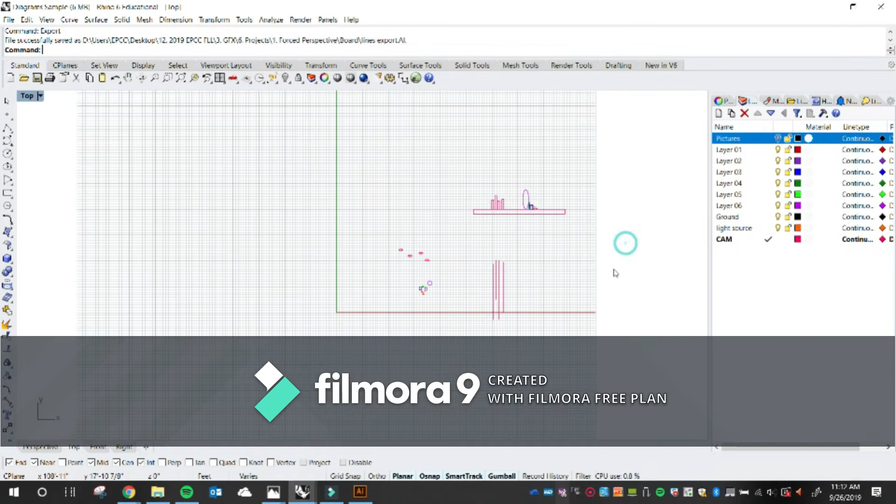So again, it's a sketch, so let's maybe start there. You guys were working on your diagrams - this one's right here, just walk around. I mean Samina's doing something interesting right there with the photos. Since this diagram kind of came up, it's something that you'll be doing in order to explain your projects.

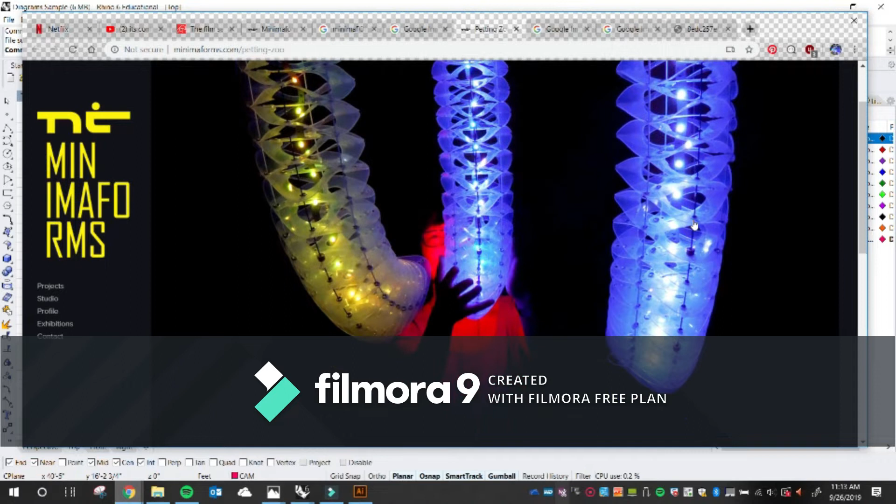I know that I had to do a multiple of this when I was in school, and I really wanted to recommend these guys right here - they're called Minimaforms. They're two brothers, studied in London I think, but I think they're Greek. So anyway, they have these project installations.

And what's really neat about them is their drawing. I mean all their work is really interesting, but the drawings that they do in order to represent their work - that's kind of like the sort of diagrams that you'll soon be doing, and that's kind of where we're starting right now.

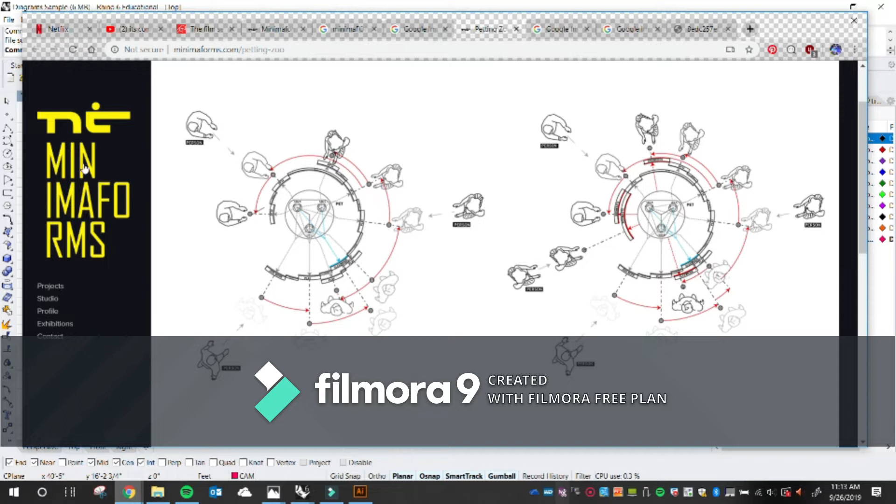So this one right here, from a top view, how these people interact with, in this case, this installation. So maybe it can give you a little bit of background - just check their work, Minimaforms, they're really really interesting architects. So that's what we'll be doing.

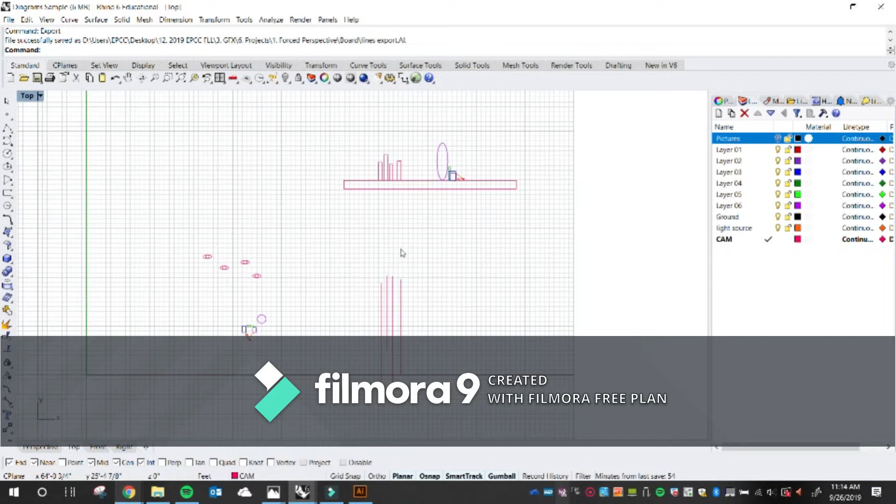So you guys familiar with exporting lines from Rhino? Well let's do a refresher. So once you get your diagrams done, make sure that you turn off the images - we don't need those images. If you are tracing with the images, some of you guys jumped into Google Earth - that's awesome, that's great. Again, don't spend too much time on the detail. This is the case where we're not so much concerned with the detail.

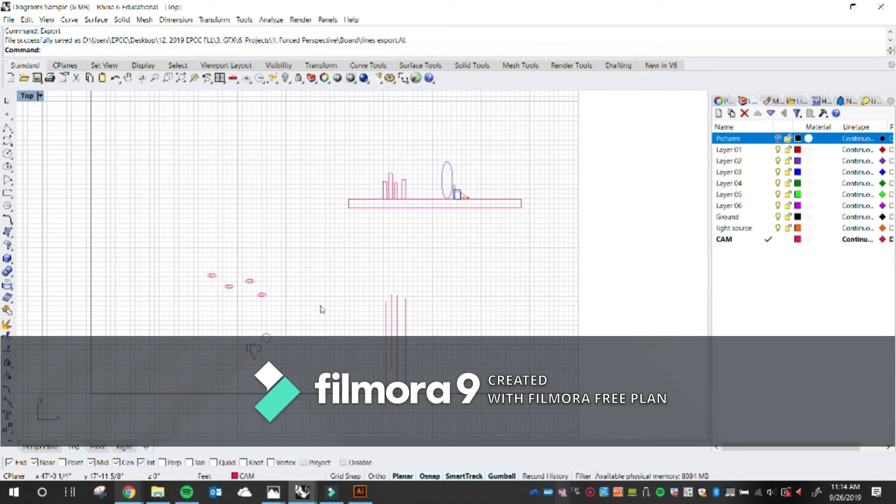We just need an overall idea of where we were standing. So turn off those reference images, and select the work that you want to export, and we type export. So we export all of this work right here. Just make sure that you don't do as I did right now.

Something really important is that you change the file format. By default it's going to be set to Rhino, so you end up with Rhino files, but you actually want the format to be Illustrator - it is right there, Adobe Illustrator. I just like to call them something simple that reminds me what it is, so I just call this lines export, but we can call this diagram export.

So again, the first thing that we should do on Illustrator should be to create or set up our file. So file new, 11 by 17. Again important, make sure that your units are correct - it should be inches. Create.

And oh, I didn't realize but there were extra boards. We just need to get to document setup and edit artboards, and I'm gonna get rid of these two other boards because we don't need them. Escape, control zero.

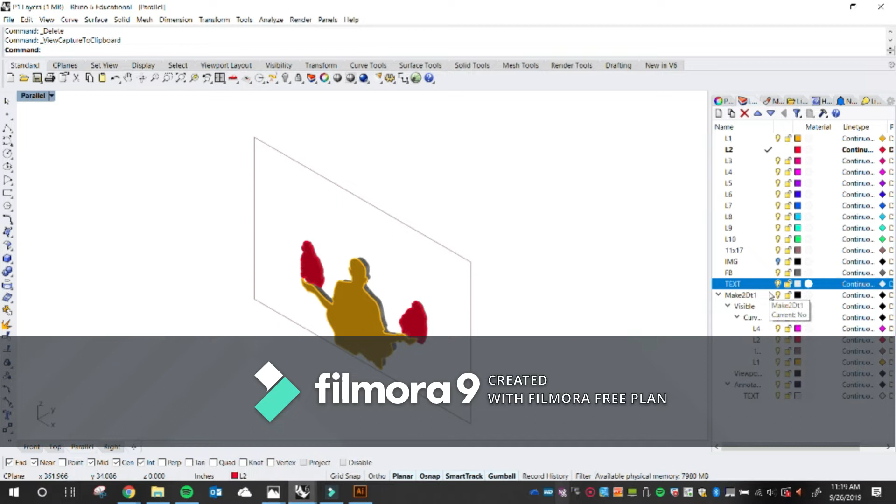So now we're making the connection. Okay, so little house number 1, and you have it right here - I have right house, or house to the right. This should be left house - it's layer by layer, and I'm even changing the color. So this actually should be that blue right there.

So again, we're color coding, we're diagramming, and we are waiting for the laptop to respond. There we go. So we do that right there.

So I'm using those layers, which again, if we come to the final photograph, should be matching that right there - house to the right, house to the left, we'll have beetle, or car. And again, you can call these subject 1, 2, 3, 4, or kit 1, kit 2 - it's up to you, whatever works.

We'll label our light sources and camera position. Part of it is how to differentiate among objects, so I'm using some of the fill components. For example, the camera, I could select that. They're in a group right now, so I'll double click on it, select it, and come over here to the left.

It says it has no fill, but I can escape and flip them. I'll remove the outline and give it a fill, like that, so it turns into a solid object. You could then, if you want, give it a black outline, and decrease the weight of it. The idea is that objects kind of start popping out.

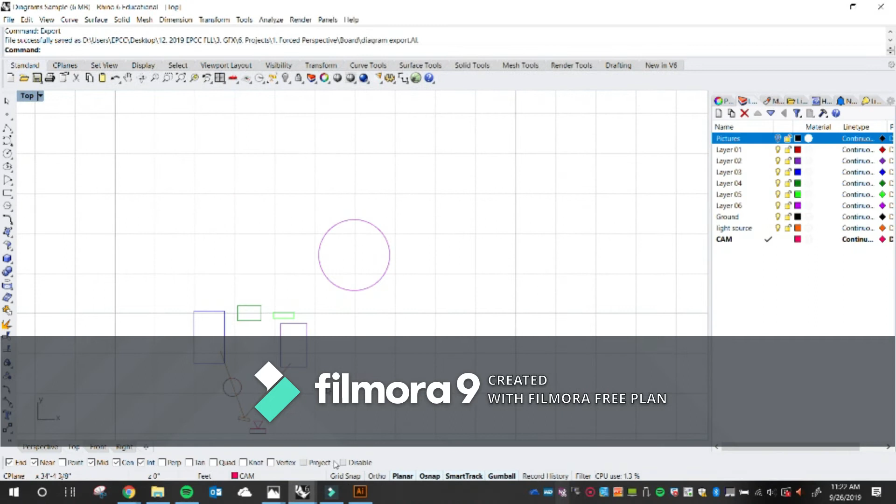As you can see, these objects right here were actually solid on Rhino—they're actually solid right here. But I went ahead and dashed them, just for legibility here on Illustrator. We can do that as well here.

So labeling, as I mentioned, some distances between objects, and I did that just with the pen tool. Press P for pen tool, and I draw this kind of U shape. Make sure that it's solid, because right now it's dashed, so I select it, come over here to the stroke, remove the dashed, and send it to black.

Now also remember that there's the eyedropper tool. If I select an object, I can match all of the properties from an adjacent or any object on the document. So if I press the letter I for eyedropper, this target appears. First you need to select the object you want to match the properties to—so I select that U right there, press I for eyedropper, click on that object, and it matches the properties. That's very helpful as well.

I'm just making one of them, and I can come over here. Again, I use my smart guides on, and I can just stretch this to make it line up with that. Stretch this right here, make it line up with that. These are just simple text boxes—I'm holding Alt and dragging to make a copy of it, and maybe 2 right there.

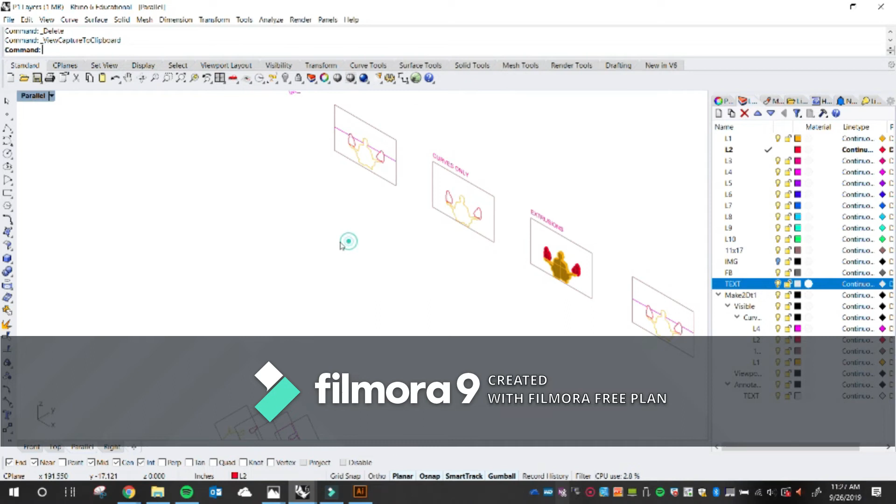All right, so we left off somewhere over here where you guys were tracing and you were extruding, correct?

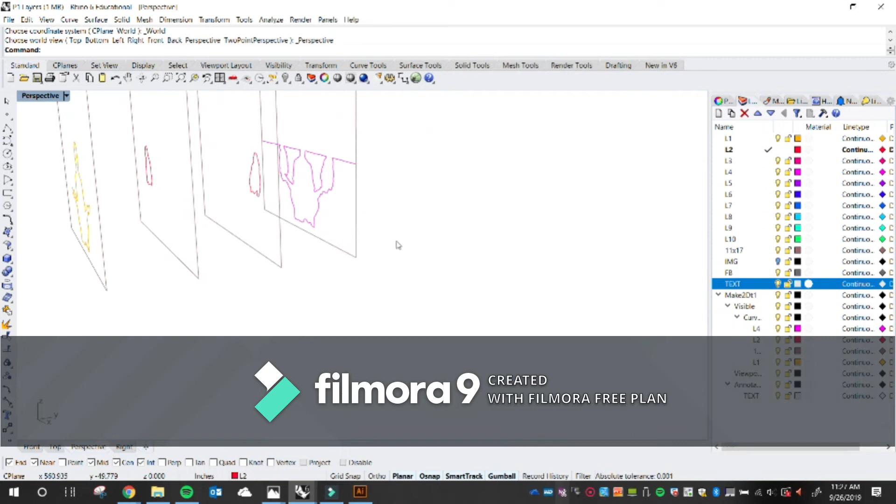So what I have done is I exaggerated the layers, the spacing between the layers. Go to perspective. By exaggeration I mean that the spacing right now among layers is not really the foam board that you guys are using. This is actually more of a diagram explaining the sequence of the layers, not so much the actual spacing between the layers. Okay, and I'll show you guys how to do that.

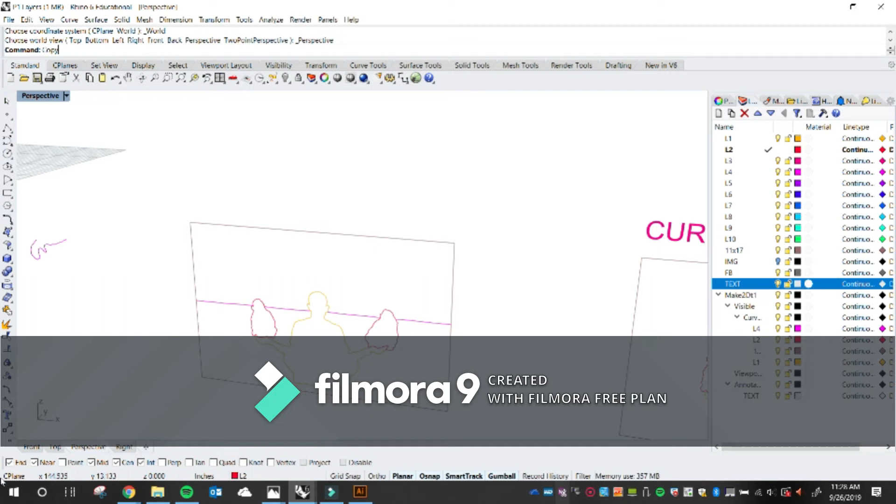So make sure that you make a copy of this drawing that you should have with all of the layers on the same plane, right? They're all matching. Okay, so I'll make a copy of that, bring it somewhere out here, and I'll hold Shift so that it's aligned to it.

Okay, as you can see, I have frames. It's very helpful to see these frames right here, and you see how I dashed them on the board itself. They're not physically there. When we see your final model, each layer doesn't have a frame like that.

However, it's very helpful to see that actually all of them fit among the same surface, that they're being stacked up. And that's what this dashed line or dashed outline is helping us see. Okay, and I'll show you guys how to create that.

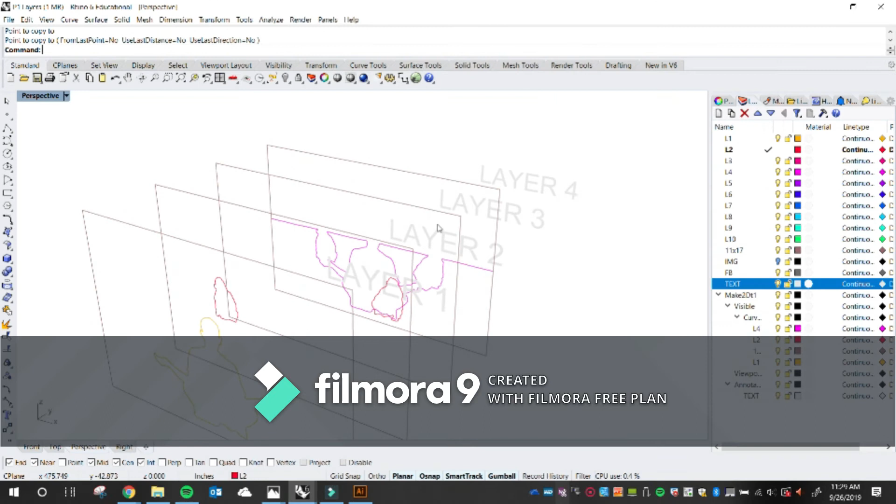Very easy, right? So we have one of it right there in place, so there's the copy command. You select the object that you want to copy, right click, there's this option right here on top, it says copy, and then it says in place. So it's going to generate a copy and place it right on top.

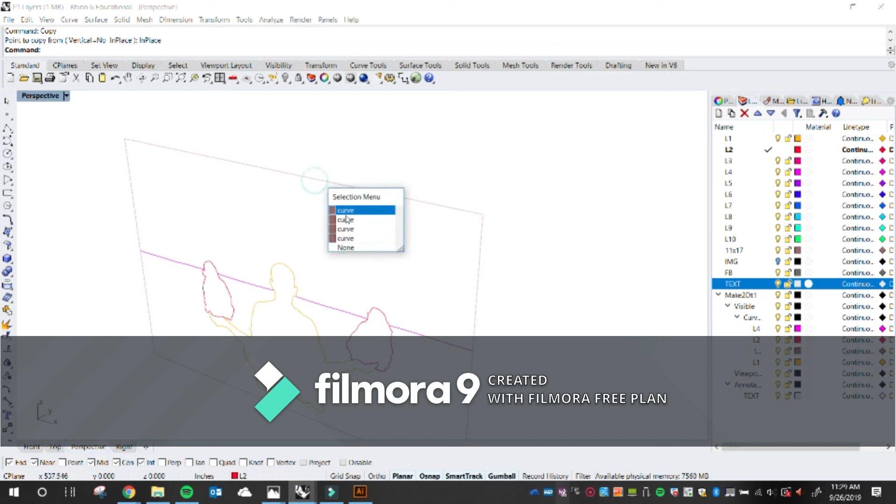Okay, so I do that. Right click, repeat. Now you see that I have 2. I'm going to create as many as I have layers, so now I have 3. Right click, copy, in place. Now I have 4. I only have 4 layers right here, so that's all I have.

Okay, is that clear so far? Yeah, okay guys, so now what we're going to do is kind of accordion them, right, kind of like explode them. Actually, what it is, right?

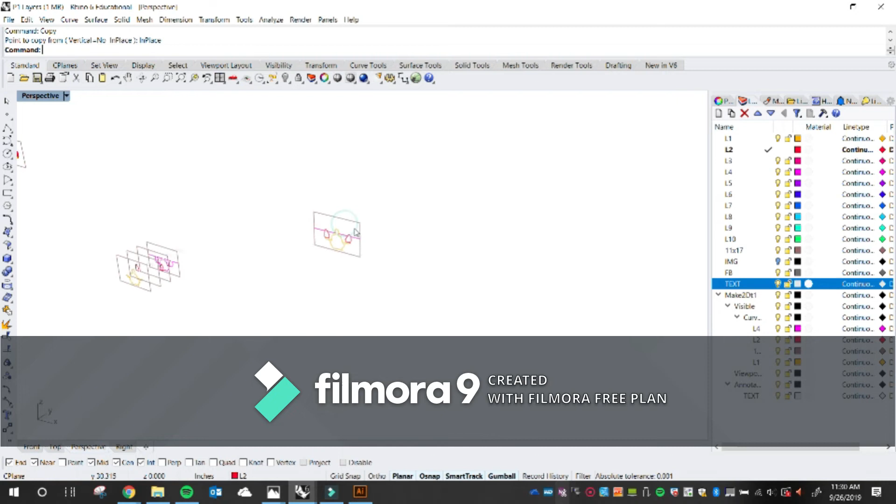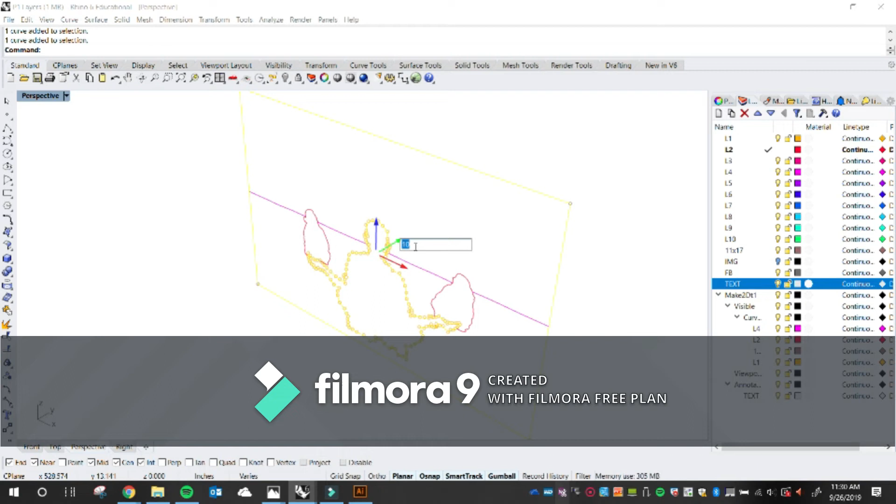So in this case, yellow is the first layer. So I select yellow, hold Shift, and select one of the frames right there, just one of them. And I'm going to bring it towards me, so I'm going to move it in the minus direction, and I'm doing this right now in increments of 5. It might work for you as 5 as well, or just see the spacing. So I'm going to do -5, enter.

First layer moved. Whoops. Whoa. Where am I? There you go. So here I am. Okay, so the first one has been moved with its corresponding frame.

Okay, in this case these two should be on the same layer, but I'm going to use them in different layers just so that I have more layers to work with. So the next one, the first one is the sitting guy, the next one is going to be one of these floating girls. So actually, I'm going to leave that one right there in place.

All right, now I'm going to go into the third layer.

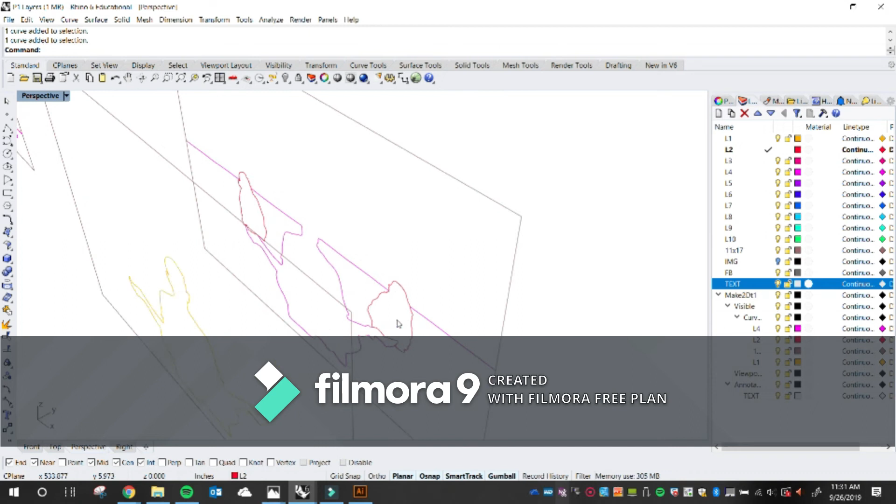I'll select everything, but let's do it in the same direction so it's easier. How about I move this another 5 and another 5, so that we move everything in the same direction. I don't want to confuse you.

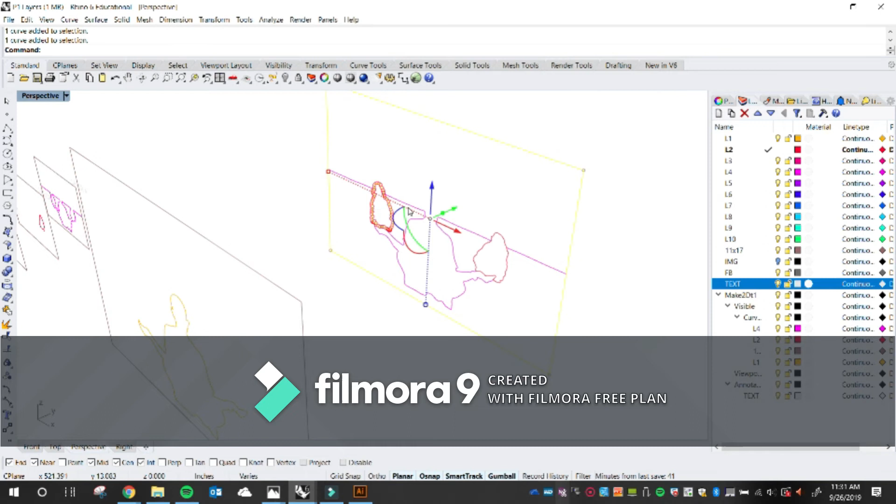I'll select that layer right there, and then one more frame. So I'll move this now. The first one was 15, I think, if you add the numbers right there. So move this now minus 10.

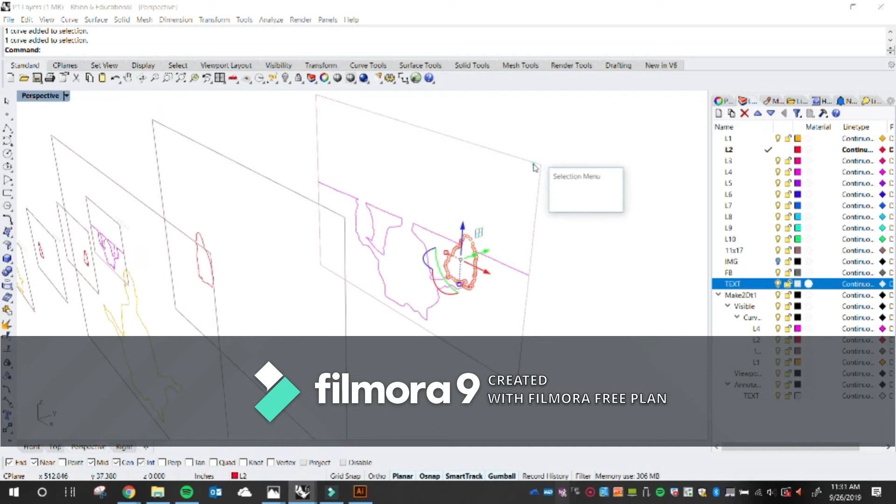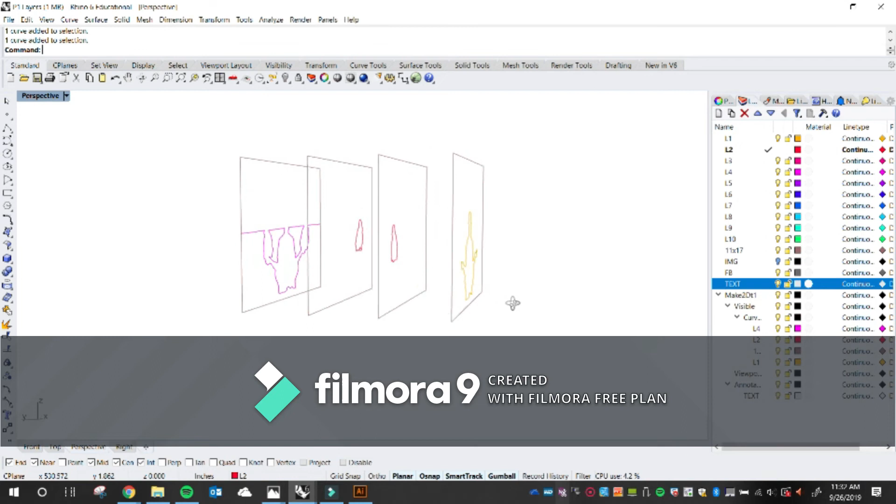And then this one over here with this one, I'll move it how much? Minus 5. Right, so minus 5, and we got that right there. See it? So there's the spacing. Again, this is just showing the sequence of the layers. It's kind of neat, no?

Just the outline for this part right here. Okay, all right guys, so that's that part. Now the next part is actually turning this into an isometric drawing.

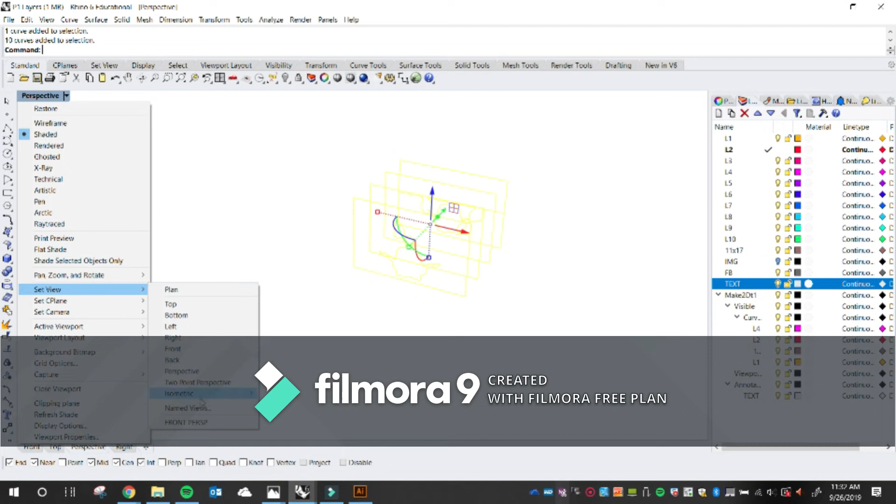So we select it, right, we go to set view, isometric, and I'm going to select southeast isometric. Right, so it brings it all together, but right now it's being selected. So if we go up here and select and click on zoom selected, it maximizes that right there. Okay, so we have that view.

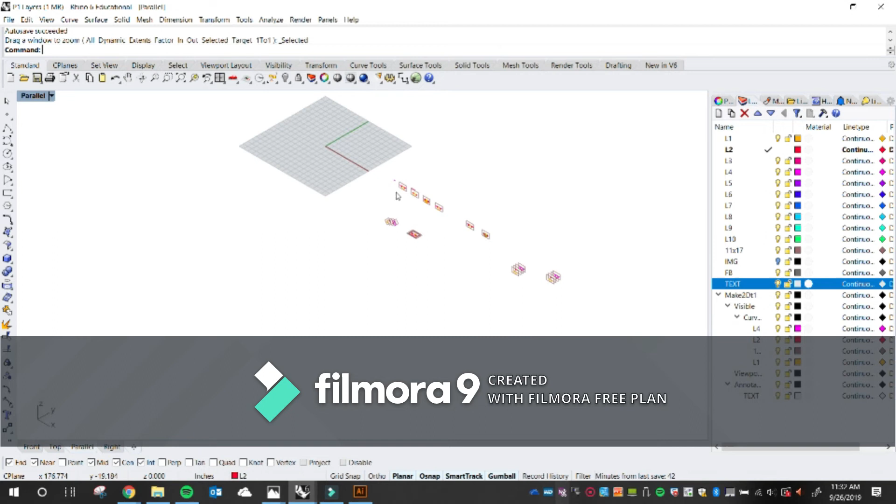Now you'll see as well that I have a text object, which is nice, right? So we can actually do that real quick. If you type text, is that right? Let's see, it's called layer 1, and I'm gonna snap to that layer right there.

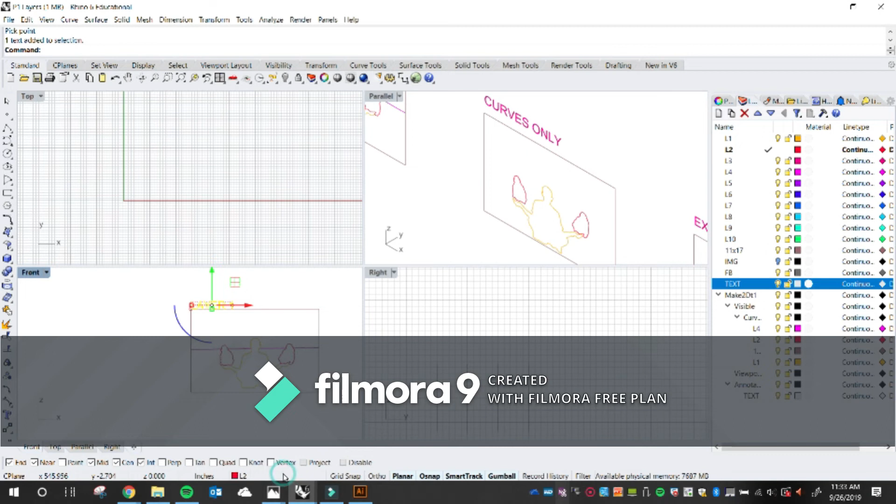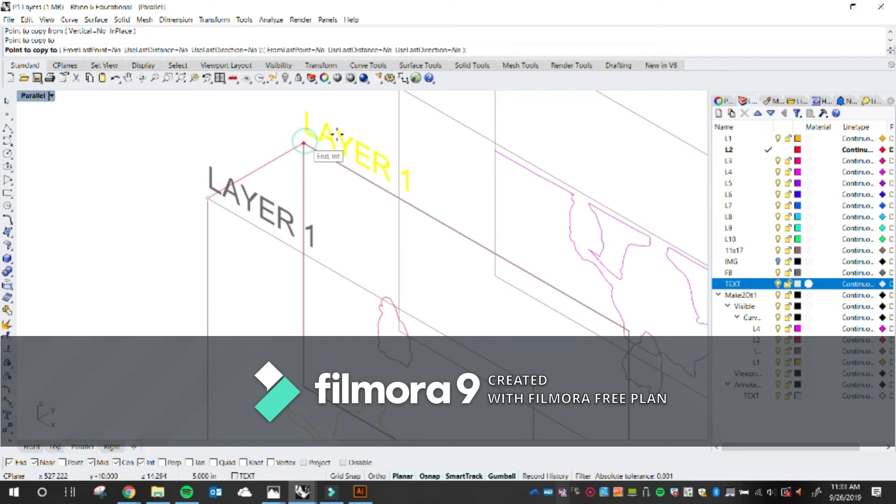I created this additional layer right here called text. I'm gonna send that text I just created, called layer 1, into that layer text. Again, I'm way up here. There it is. And I can move this just a little bit upwards, and I copy from there to there, to there to there. You double click on the text object.

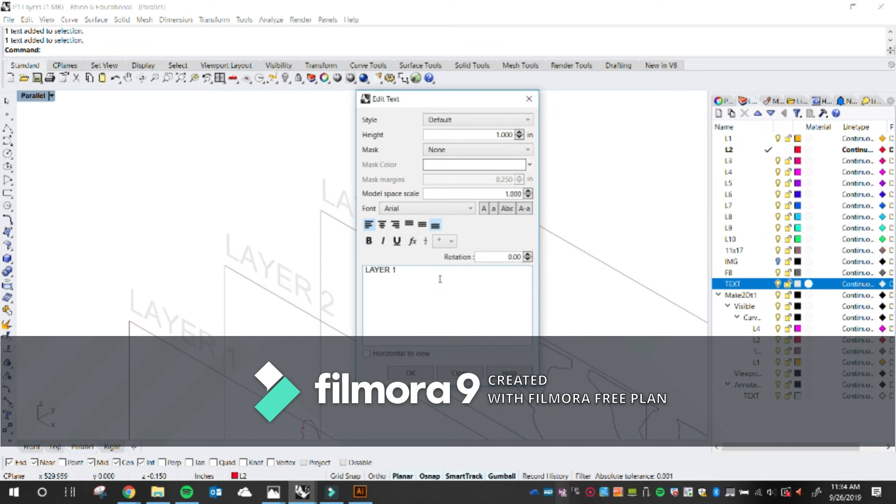2, 3. It got highlighted for some reason that I don't want it to. Oh, there it is. So there we go, we have that.

Okay guys, now how do we turn a 3D object into a flattened image, flattened lines? It's make 2D, right? So again, because this is, even though they're just lines, it's still 3-dimensional, right, rotating around it.

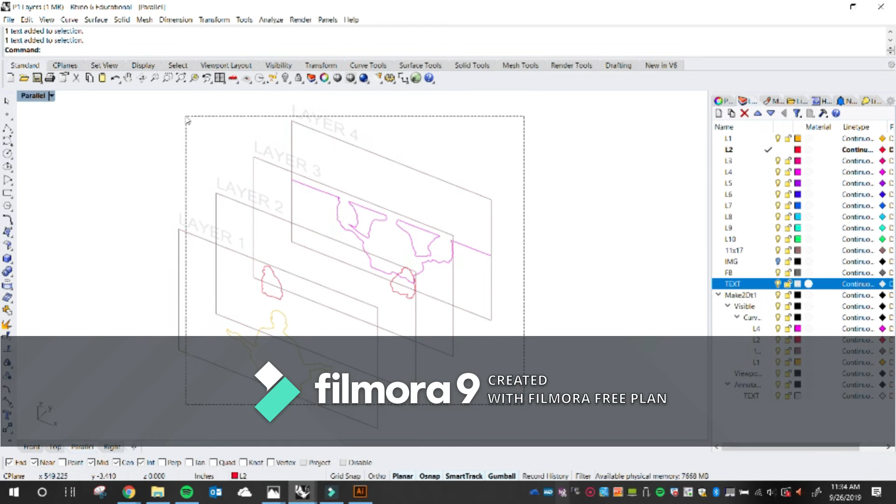But I just got rid of my view, so I'm gonna select them one more time. Right, go to set view, isometric, southeast, zoom selected, so I get that right there. Okay, and you guys are right, select the objects, make 2D.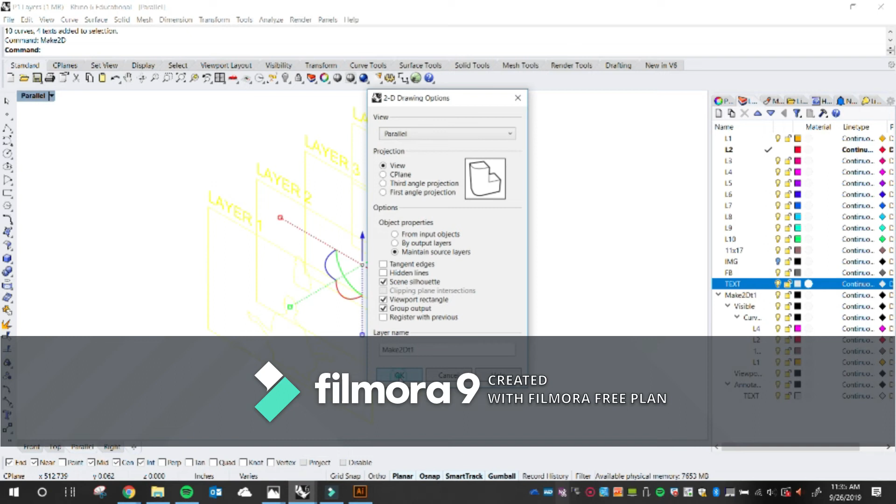Right, and we go to the top view. Make sure the first thing that you do is actually type group. So it's actually group, and move it out of the way. Right, so that gives us that drawing right there.

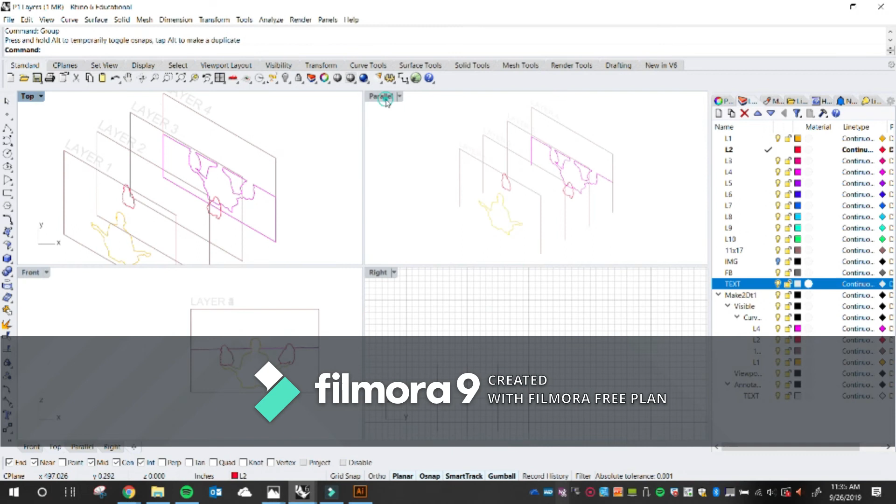Okay, when I exit out of the top view, I'm going to go back to my parallel view, back to my perspective view. Shaded and set view perspective.

And then now we're just going to capture our 1-point perspective, which again we're going to place center with the screen. Right, so about that distance, that distance, that distance, that distance, center. I'm going to hold Control and right-click scrolling. I'm holding Shift so that I'm placing this, right?

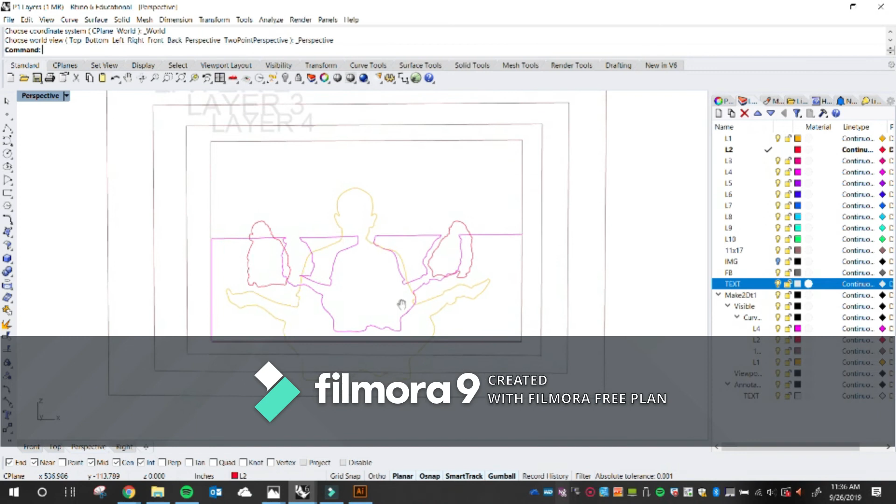I'm moving this, hold Control and scroll out a little bit, right, so that we get this 1-point perspective, as best as we can.

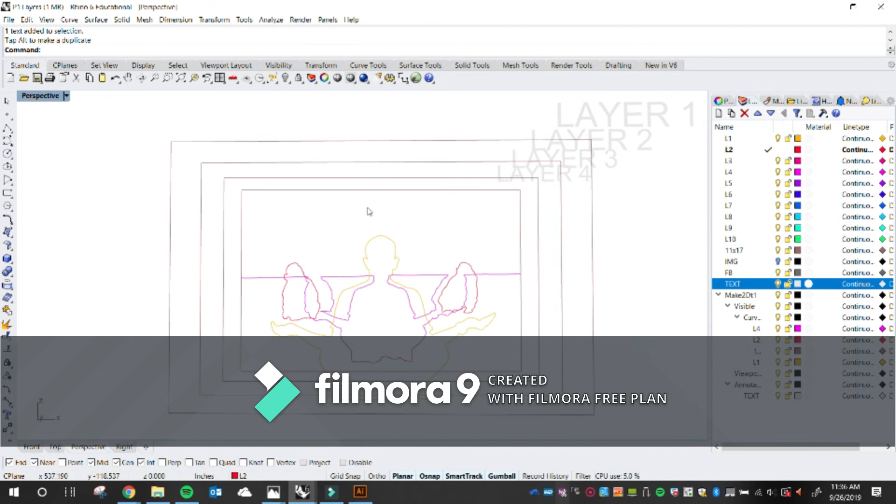Right, without cheating right there. I can select the text and move it out of the way a little bit, so that it's a little bit clearer, whatever is legible. And actually it wasn't exporting on this kind of view, so we'll see if that actually works. But again, now we want to see the layers fading into the vanishing point for this 1-point perspective.

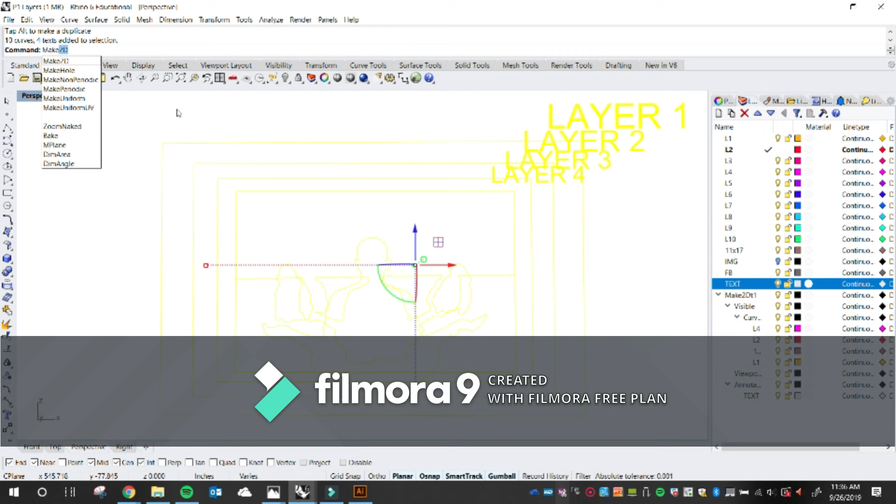Right, so again we select, we type make 2D, and click OK. Double click on perspective, double click on top view. Again, you can just click where it says right here zoom selected.

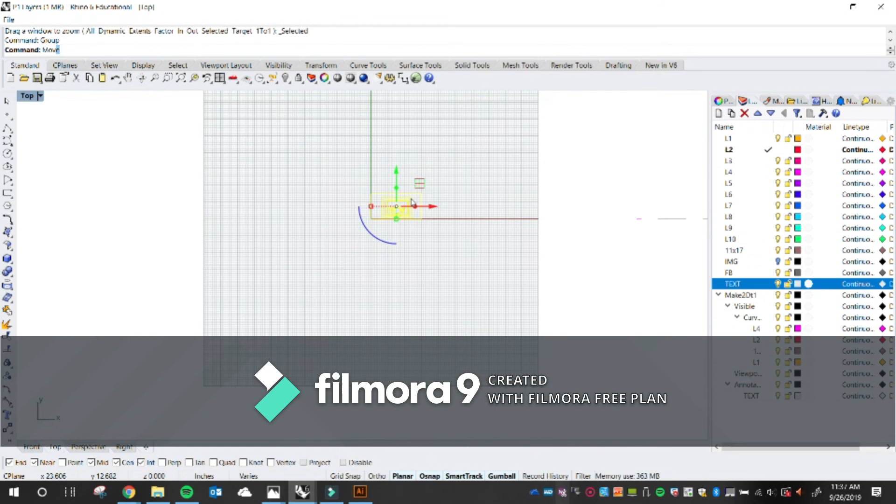Since it's already exported, it's selected. And first thing that we do, we type group, enter, move, so that you can get it out of the way.

There's a setting I forgot to deselect when you do the Make 2D, so we don't get those frames. This one right here, viewport rectangle - unclick that when you're generating your Make 2Ds. Group output is checked, but it doesn't group the output unless I'm doing something wrong. But if you unselect that viewport thing, it will get rid of this rectangle, which we don't need. Sometimes it's nice to have it, but in this case we don't need it.

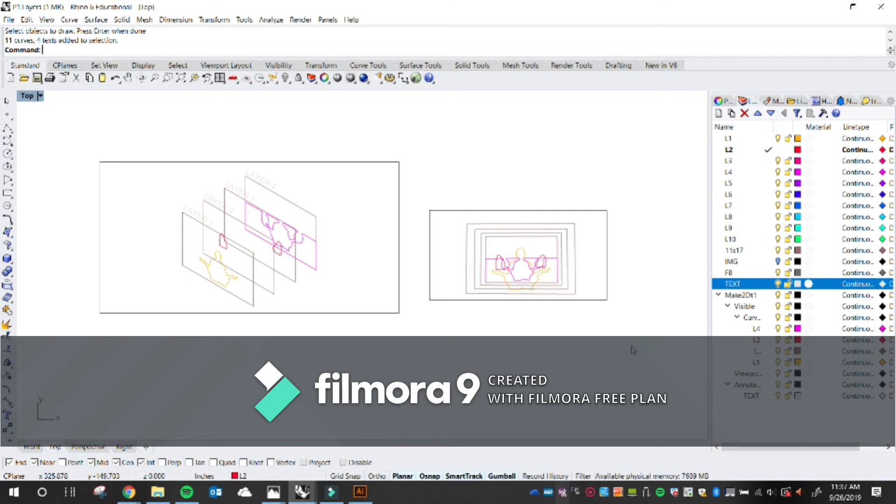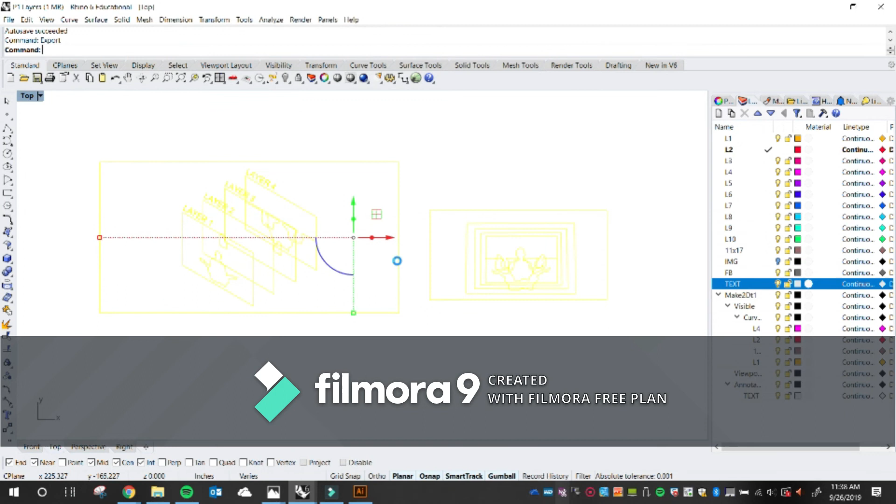Okay, same deal - we select the objects, export. Do exports, and let's call this construction export. We save it, click OK, and if we go to the folder where we saved it, construction export, double click on it, open it. I'm not sure what this message means, but just click OK if you get it.

You guys are working on a newer version, so I'm gonna get rid of those frames as I mentioned. Select them, delete them, select them, Control G to group, select them, Control copy so you can paste them. We paste them into the board itself here. You saw I double click on the group, select the outlines, and turn them into a dash.

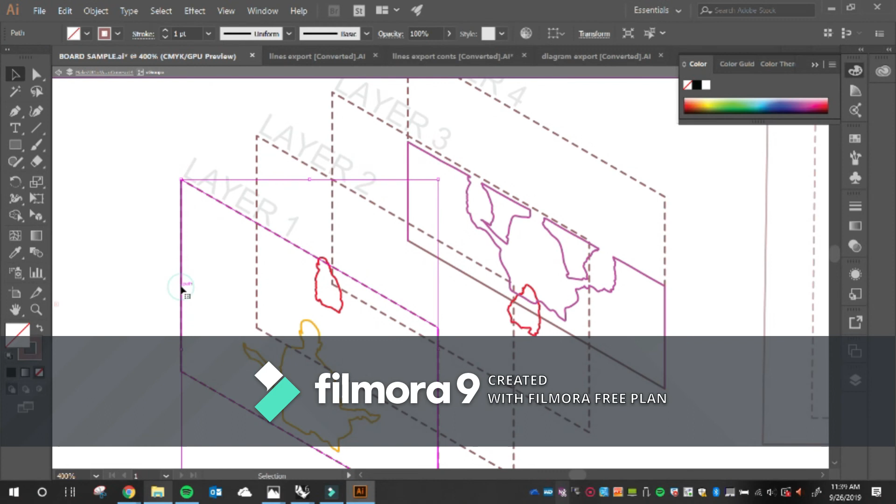And the rest is pretty much the same - you have those colors matching.

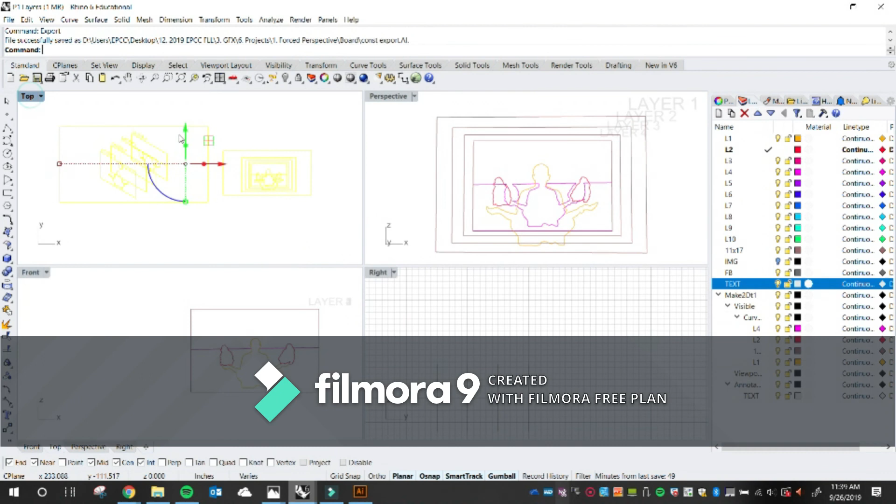Just to answer Pablo's question about the color and how to get the white background in those images, let me get back to the file. The last drawing we're exporting is your extrusions, which in this case is this one right here for me. As selected - so that's the extrusions.

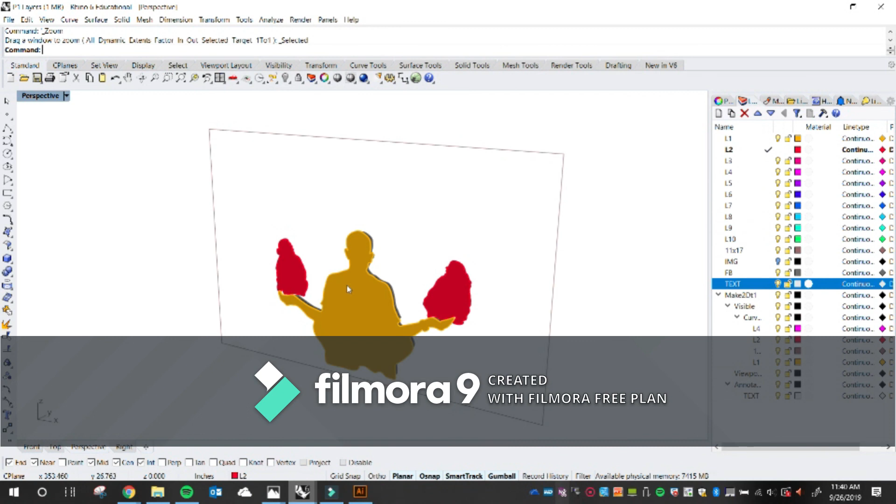Why do we work on the extrusions? It helps you with your model, right - so you actually build that, so you have an idea of how this is going to look. I generate some sort of perspective where you can see the project, and in this case we're just gonna do an export of an image rather than lines.

So you guys remember: View, capture to clipboard. We click OK, and it's stored on the machine. Then we just do Control V and paste it.

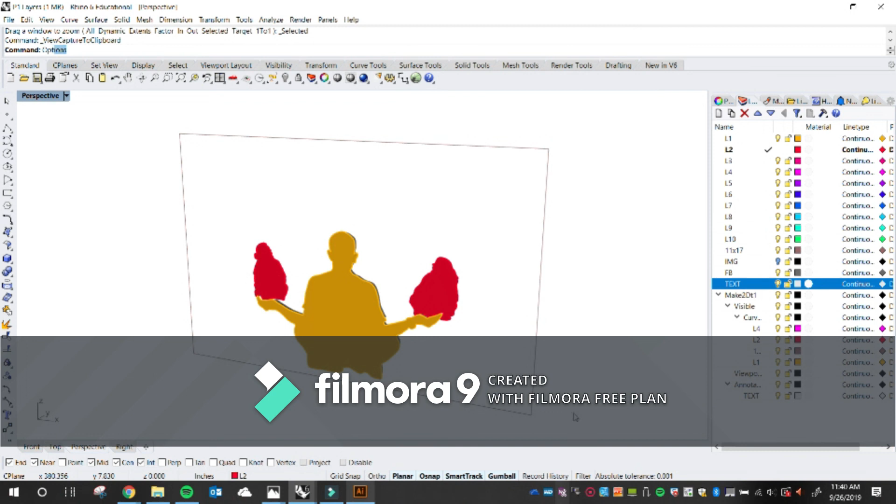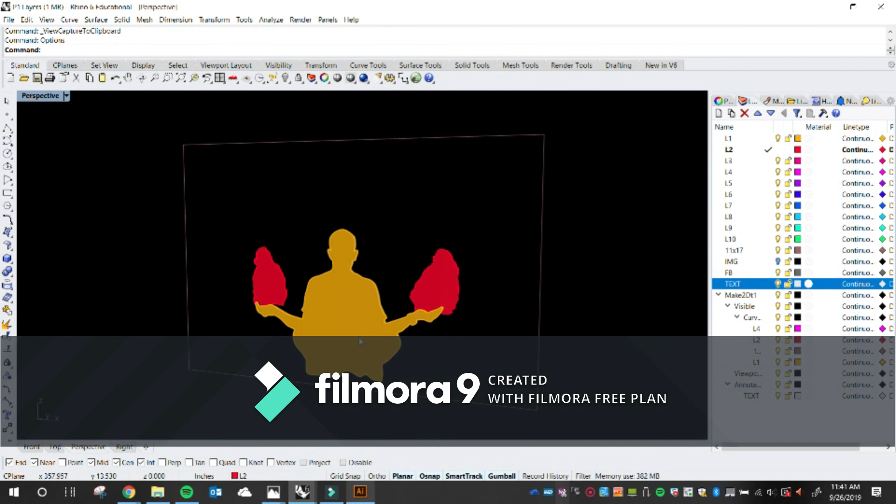Now if your background is white, it works nice because it's a white sheet. Very simple - just type options. I see most of the computers here are on gray. We go to Appearance on the left, click on that drop down menu or that little arrow, Colors - so colors right here to the left. We go to the right, Background, and we have white. Or if you want a black background, that's cool too - that means your Illustrator sheet would have to be black, and everything that is black, such as the text, should be white. That also works very nicely, especially with bright colors like that.

Going a little fast so we can cover the content, but remember all of this is being recorded right now. That being said, questions?

Anything? Okay, just go back one more step. So for the what? The extrusion, yeah - so that's the capture to clipboard. That's how we do the extrusion.

We paste it, and now this is an image, right? These are lines - all lines right there, these are vectors - and this is just an image that is shown in the extrusions.